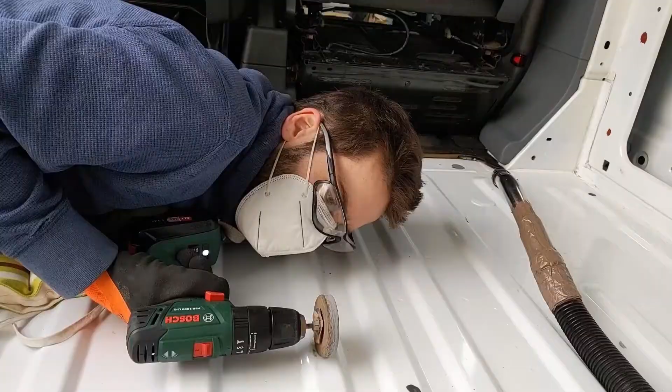So the time's come to take out the bulkhead. Get to see into the cab from here for the first time, which is pretty cool. Can't quite remove it with just the drill on its own - didn't really like it, not enough torque. So I'm going to go through and do each one manually.

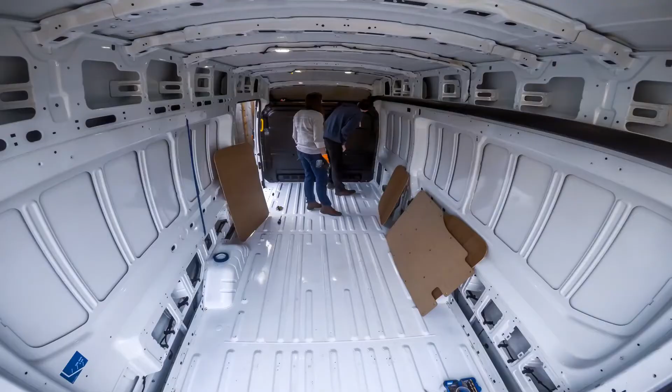So I was trying to get them out with this, which fits T30. Unfortunately it's so small I can't get enough leverage on it. Okay, that one's going now, but some of these are really tight in - I just couldn't turn them. The real problem is down here, there's just no way I'm getting a good angle on that to get it out. Don't want to risk burring these ones because drilling through that would be an absolute nightmare. Fortunately I've got an old electric screwdriver which doesn't work anymore, but it does have the T30 attachment for it, and it has a really good grip. So with this one I'm able to get in - see how tight that is. Nice, we should get them all out with that nicely.

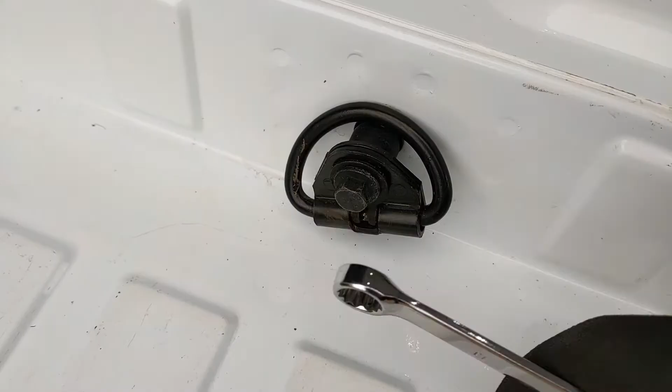So while Tim's trying to take out the bolts of the bulkhead, I'm just taking out the last of these cargo loops. There's one here and one there as well. Hopefully we might be able to repurpose these somewhere - we'll see.

Oh, some clever person at Ford has decided to bolt this handle in the most awkward place possible, so I can only turn this spanner about 20-30 degrees each time. I'm going to be here for a while, I think. My hands are so cold now.

It's more awkward with gloves on. Right, got it, there we are. Handles off. Woo. So these should pop out now, hopefully.

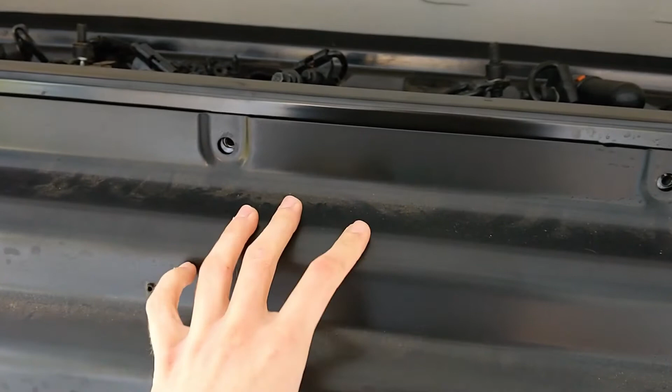Give me a hand, Abby. Let's see if it comes out. Oh, something at the bottom. Oh no, okay - there's the cab. Hey, that's heavy.

So now we can see straight into the cab, which is very cool - suddenly looks a lot bigger. You can see under our seats there, bit gross. We were imagining we'd be able to build a new bulkhead that went straight up, but as you can see the chairs lean back a little bit into the van, and there's really no clearance at all. In fact, if I get in and extend this to my normal position - maybe that's a little extravagant, but from there it's probably my normal driving position, and it comes out quite far. So that's interesting, I have to think something around this. Either that or I just have to drive like this all the time - very safe, right up against the cab.

So now that we've got everything in the van clear, we're going to start marking out our layout. We've got a mock-up here we did on paper with little cutouts we made for things we think we're going to need, and rough placement of them. But obviously until we get them in the van we're not sure if it's actually going to fit. So we're just going to mark out the measurements with this blue tape and hopefully it will kind of work. Let's get to it.

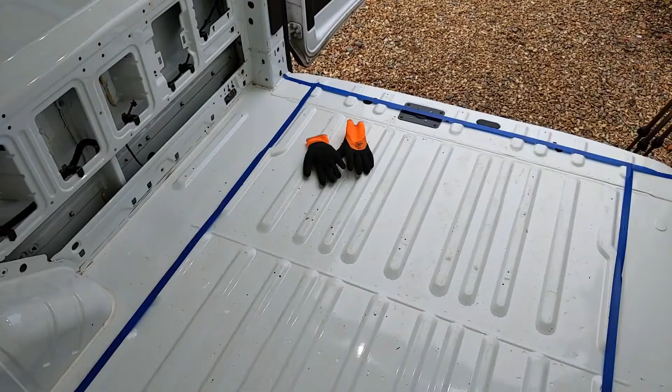That is the spot reserved for our double bed with a little extension, hopefully, and a little seat area. We've got the kitchen coming around here. That square box is the shape of the sink that we've got. The oven is going to go in there, probably, hopefully. And then this is a bit of extra work surface.

So we've marked it all up in there now, using our little blueprint as a guide, which we didn't know if it was going to be that handy or not, but it turns out it really was. Mostly for the bigger things like the bed and the shower and the appliances. Quite fun lying things down in a little bed space and getting an idea of how it's going to be.

But what we realised is that inside there, space is really at a premium. We need to be much more accurate with our measurements. And we didn't include anything on there, did we, like the walls and the cladding and everything that's going to go in there. So the ply lining and things like that, you don't really think about when you're first starting the project. And if you drew a line around that grid, it's going to be so small you wouldn't even see it. So we're hoping there's something a bit more accurate we can use to map out where everything's going to go. But so far, this has been really handy.

So we've transferred our paper drawing into SketchUp, and we've tried to do it to scale based on the measurements we've taken in the van. A little bit tricky, obviously, because there's lots of curves, so when you're using the tape measure everything is a different measurement. But as best as we can at the moment, we've got it in there, and we've put in some of the common objects that we know we're going to have, like the fridge and the oven. Oh, just dropped a fridge there. We've got some of the objects in there of what they're going to look like, in hopefully the right dimensions, so we can kind of see if things are going to fit. And so that's what we've got now.

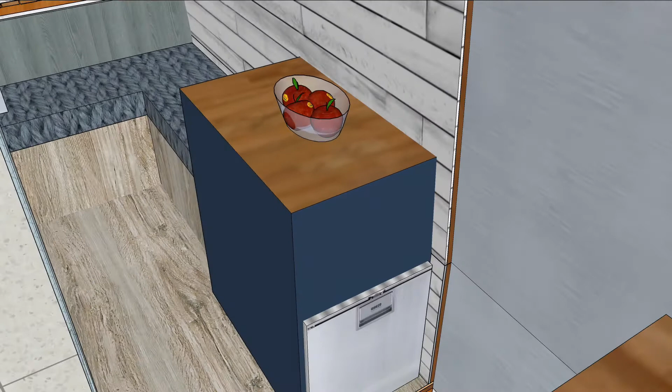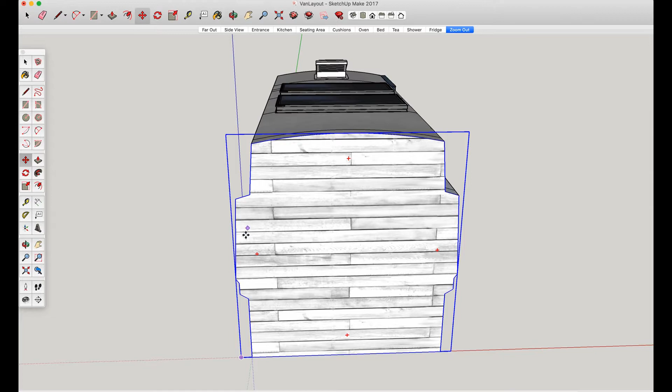Okay, so here we have our van. Let's give you a quick tour of our rough design so far. This is basically the actual dimensions of our transit on the inside, or as close as we can get to it. And these weird shapes here is because this is where it kind of dips inside, where we're going to put some insulation in those bits.

And we have actually tried to model the outside edge as well, so you can see here, this is the outside edge and the inside edge. After a lot of doing. Took a lot of work to model this bit, but wanted to get it as precise as possible.

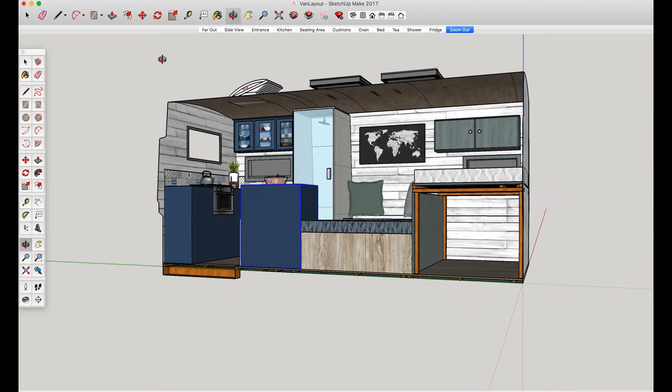And you can see on the roof here, we've got our fan, which is looking quite good up there, with a couple of solar panels. We're not sure actually how many we're going to have at the moment, or exactly where they're going to go. It's just an example, isn't it? Yeah, so this is just a guide to give us a general idea of how everything could fit together.

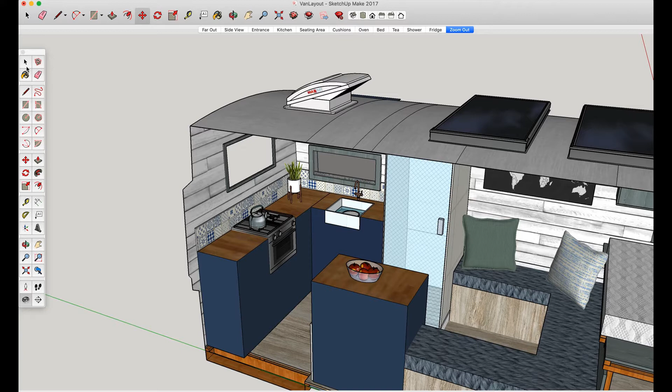If we then walk into the van, so this is the doorway. I'm walking really slow. You can see on the left there, above the oven, we've put a little hatch which would go through into the cab. And we were originally thinking that we were probably going to have some kind of doorway that would go in, but after talking about that for a long time, we decided that would just take up too much space on our countertop, and actually we wanted more space in the kitchen.

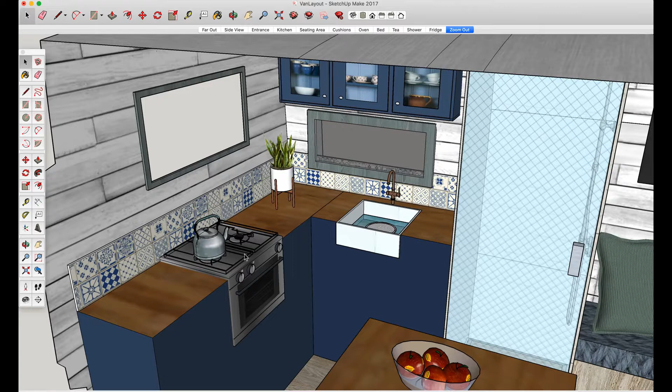We realised that the only place the oven can really go, and we want to have a nice oven in there, is pretty much here. We were thinking it could go here, but as you can see, this is why doing it here is actually quite useful, because there just wasn't enough space to get the oven in with the sink, unless we put the sink in the corner, which we also didn't really want to do.

Wanted it just behind the window there. Yeah, so at least this way you can still get in there, but you're not sacrificing as much space in the kitchen. Yeah, so it's become more like an emergency hatch.

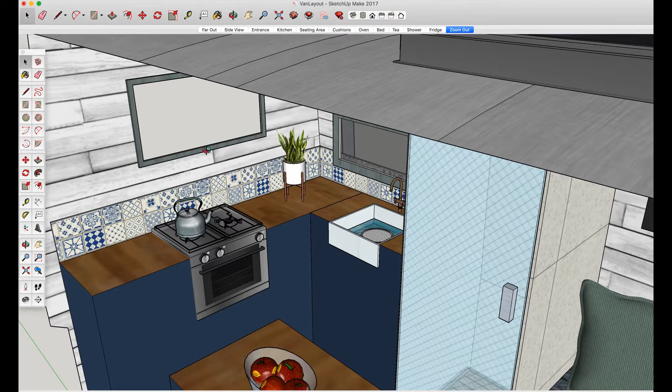Actually, on this it just looks like it's a photo frame or something, but that is actually a hole of a dimension that might not be exact.

And then if we walk into the kitchen, we've got our nice sink there, which is actually the size of the sink we've got. We've already got one.

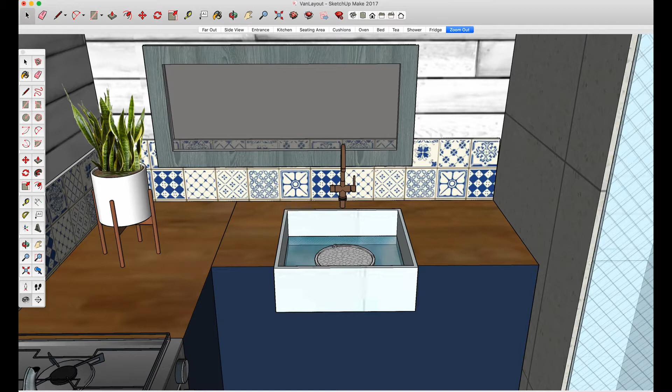And we managed to get one actually that was made out of resin from a company online, rather than whatever else they're usually made of. Abby wanted a Belfast sink, but it's obviously a lot too heavy to put in really, with our weight restrictions. So this one is an imitation Belfast sink made of resin, which actually looks really nice and it's quite lightweight.

You can see the window above the sink there. Obviously there's not going to be tiles sticking out the top of it, hopefully not, but you never know with our building, do you?

I don't think the window is even the right size as the ones we are going to order, I think. But no, again, it's just a general idea. I mean, that's not even the exact same plant we're going to have.

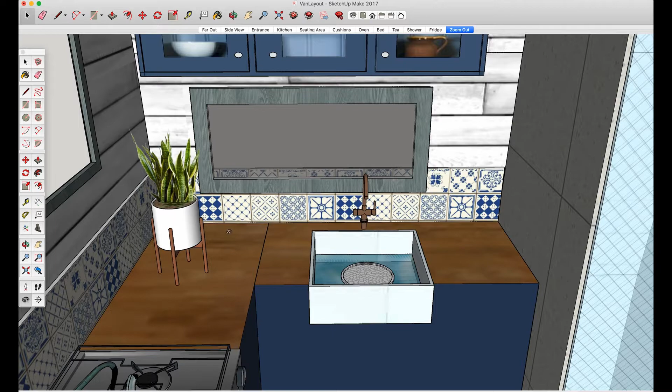If we pan around then, get to our shower. Yeah, we've got a little kitchen island here, which actually has the fridge inside it. Oh yes, which is actually the same dimensions as the fridge we're looking at, but it's maybe not going to go there. It might go around the other side, but for now, that's probably the best place we're thinking.

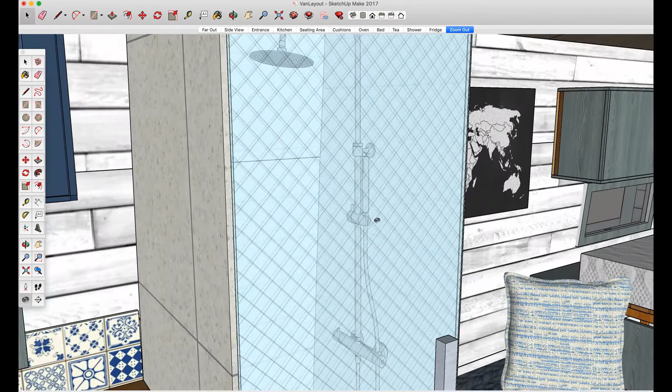So the shower - we realised that we would quite like to have a shower with a removable toilet, which you can take out when you want to shower, obviously. Which isn't drawn because it's been removed.

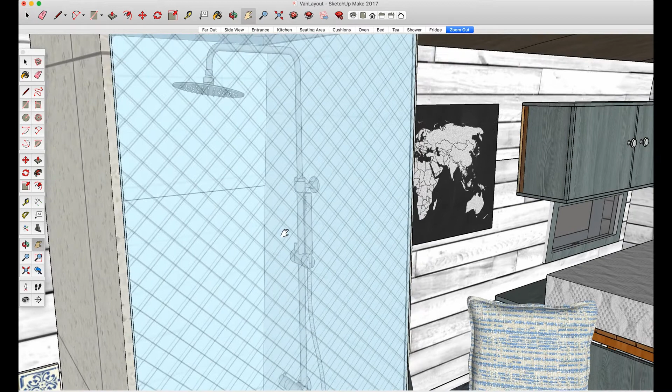Yeah, we realised that we wanted one because we were saying that if we're going to be living in the van and doing extended, long-term trips, to start off with in the UK, because of everything that's going on at the moment we can't really go anywhere else. It's always cold. So we thought it's probably a lot nicer for us to just have a fixed shower with a toilet inside, and we won't have to rely on going to gyms or anywhere like that.

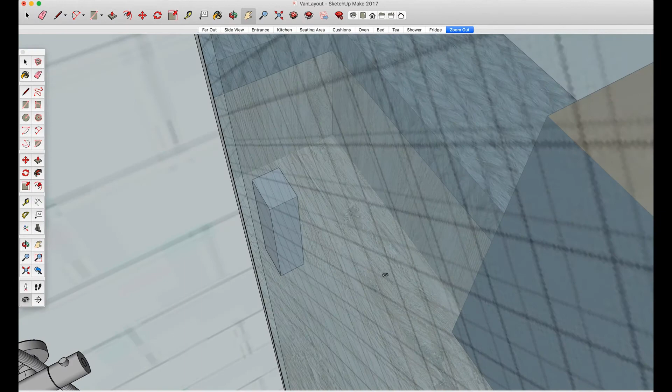So here I am inside the shower, which might be a little bit smaller - we're not sure about that. We've tried to measure a rough shower pan size, but we might find we have to change this a little bit. Probably we'll have to sacrifice some of the seat next to it, but hopefully not too much.

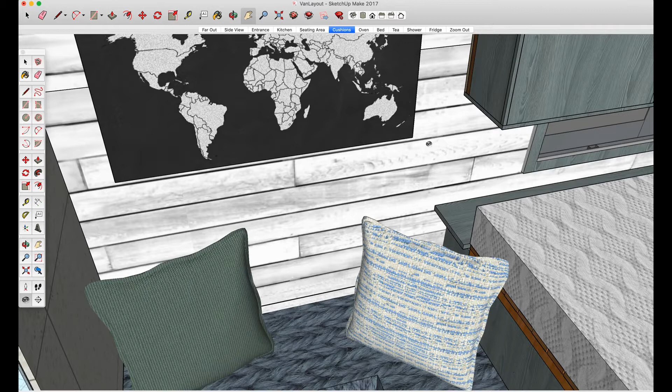Yeah, and then if we move around, so here we have a little seating area. Obviously some kind of things on the wall - this is just an example, really. We've got some kind of cabinet up here, which we'd put our clothes and personal possessions in. I mean, that's definitely probably not how we're going to have it.

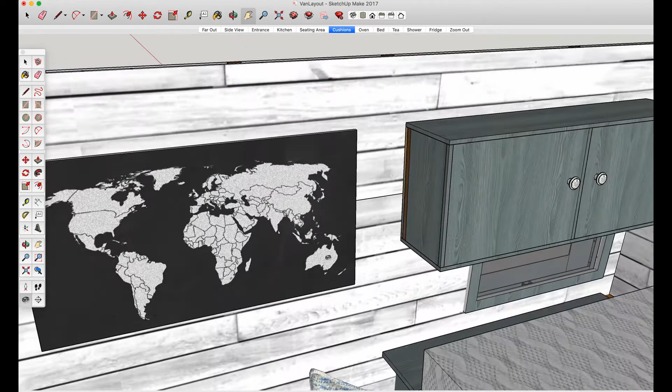It's just to sort of demonstrate what kind of thing we're going to do. But that is the right size window that we're going to have. So we have got two windows we're going to be putting in, which are on either side of the bed. So maybe not that height, but it is that size. There will be another one on this side as well, but we didn't model that.

And then we've got our bed. If I go here, well, this is on the bed here. So that kind of gives you an idea of what it'll look like from inside the van.

And we wanted to have enough space to be able to move around in here, but we also don't want to have to put up the bed every night before we go to sleep. So we did wonder if we could get a widthways bed in here, but unfortunately that's one of the first things we actually checked when we just bought the van - I'm a little bit too tall.

I mean, it could just work if we were very creative how we build into the walls and have a little bit less insulation there, but even then it's going to be pretty tight. So we decided against that, and instead we thought we'd come up with some kind of hybrid bed that is part fixed and part collapsible. And we actually can show you the first iteration of that.

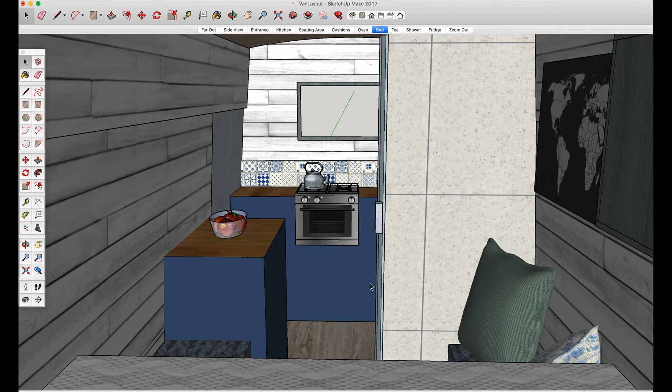Bit more like this, which we thought would actually be quite good. We'd have the bed and the mattress in two parts. One part would be removable and form the seat, the back of the seat area here. But as you can see, when we modelled it, we realised it takes up almost half of the entire van, because it's constrained to that configuration. So if that was a backrest there, we'd have literally no seating area at all.

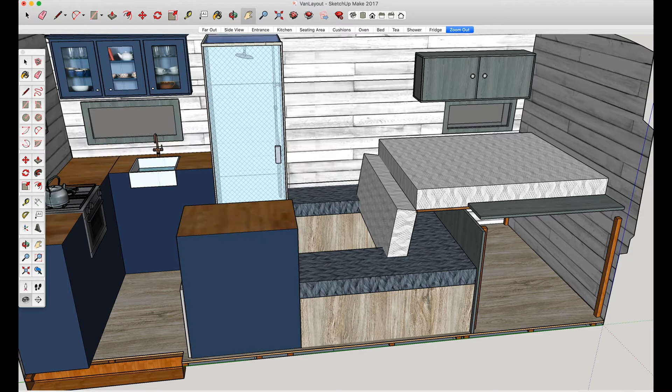So we scratched that pretty much straight away, and instead our plan is to build a kind of sliding bed. This is how it would be during the day - you can sit on there, with some cushions or a duvet or whatever. It's still nice and cozy - a little sofa, but feet down.

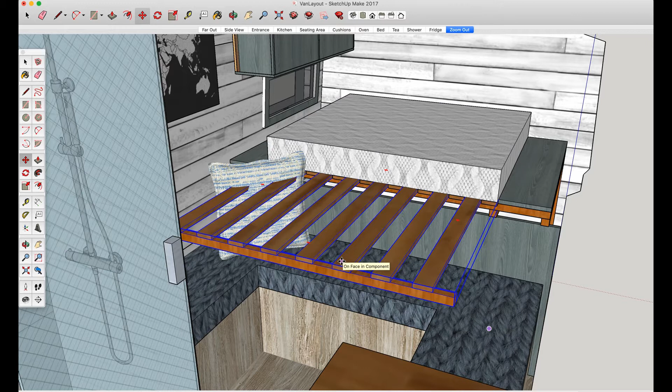Then when you want to go to bed, all you have to do is pull out the slats like this, and then pull your mattress. We'll have a piece of the mattress that goes around the sides here forming the backrest, which hopefully will fit perfectly, and then you'll be able to sit on there. When you're done, in the morning when putting the bed back, you just slide this back in there. It's not being supported by anything in this diagram at the moment, so that's something we have to get around - that's probably an important part.

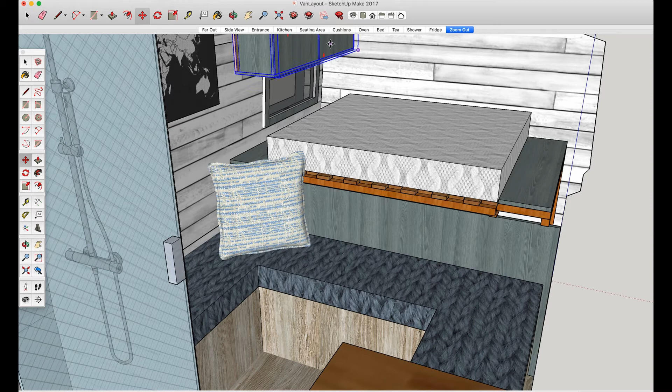So in our seating area, you probably noticed there's no table. We haven't modelled that yet, but the plan is to have a Lagun table, one that sort of free floats around but is connected down here where Tim's gesturing at the moment. But yes, that's the plan for that.

Otherwise that's pretty much it - we've tried to model just a basic structure, so obviously there's lots of things missing here. There's nothing in this garage area at all - we're going to have some batteries in there, water tanks, gas canisters, heating, all that kind of good stuff that makes it actually livable, which is conveniently not shown at all.

So we're hoping there'll be enough space under these units here and stuff to build it. And obviously this plan might completely change and might not work at all, but it gives us something to work off.

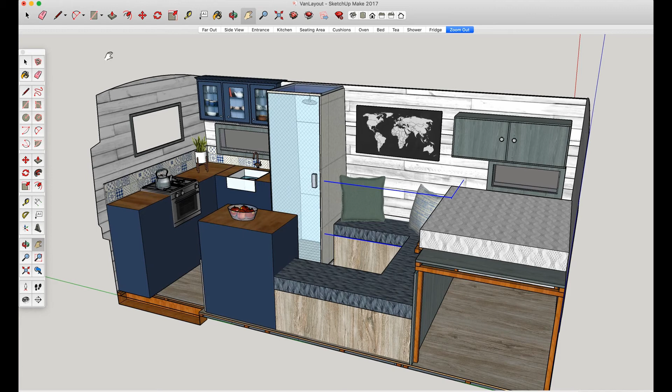The design here looks quite nice, but this is just a mock-up really, so we might actually have some little kitchen cupboards around here. There's the existing over-bulkhead storage area which we'll probably repurpose as a cupboard or something - some kind of larder. Hopefully it's big enough for a box of cereal - that would be great. It's all open to change, but it's a good start.

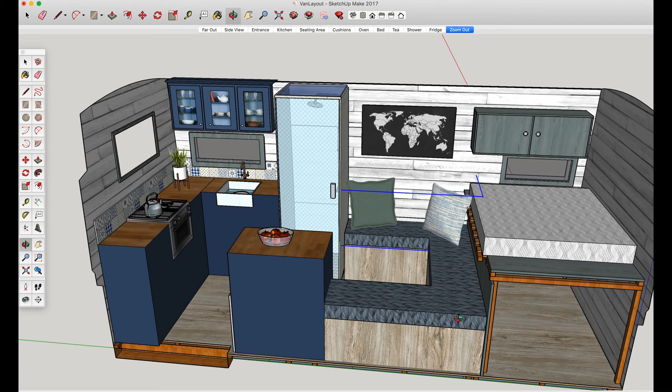But yeah, so that is it - that's our current plan of what we're hoping to build, or something at least vaguely similar along those lines anyway.

So next we're going to tackle the outside of the van and fix any problems there. We might look at the trim and things like that. Unfortunately, before we start building the inside, because our van is a second-hand van, there are a number of little things that need tweaking or fixing here and there.